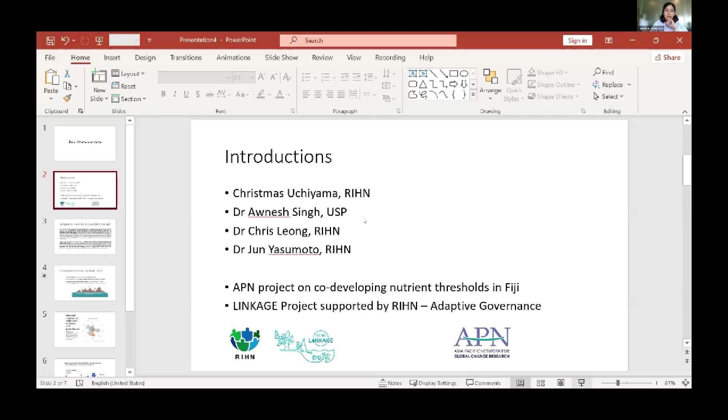So yeah, my name is Christmas Uchiyama, and this is our 9th day in Fiji. We just came from Ra province, and we've worked with the communities, collected some data, and had a nice engagement with the community there. I just want to give a brief introduction on this project, and we're really happy that COG is co-hosting this modeling training.

So for some introductions, again, my name is Christmas Uchiyama, and I'll be co-moderating with Nicholas Metherall. We also have here Dr. Awnesh Singh, Dr. Chris Leong, and Dr. Jun Yasumoto. I will try to make the training as manageable as possible.

It's a little bit tricky to facilitate on-site and hybrid training, both on-site and with online participants, but we're really happy to see many people interested in this topic. Just a little bit of background, and I know my colleagues here will introduce more, but this is titled Co-Developing Nutrient Thresholds in Submarine Groundwater Discharge.

This project is funded by APN. The main purpose is we would like to build the capacity of our local communities, as well as our early career researchers and people from the government.

However, in this particular workshop, the main aim is to introduce the concept of submarine groundwater discharge - that's the technical term we are looking for here - and how this relates with land-based activities, local culture, and practices in coastal communities here in Fiji. This is aligned with APN, the Asia Pacific Network for Global Change Research, which we are collaborating with the Research Institute for Humanity and Nature.

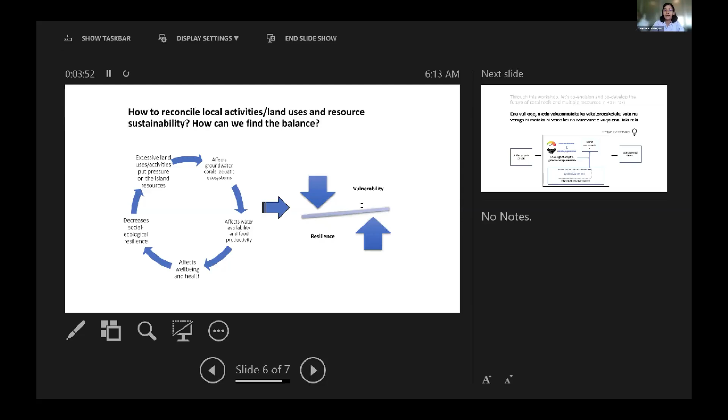So this is one of the aims of the workshop - to promote the importance of understanding this connection between the nutrients and the submarine groundwater discharge, as well as reconciling with local activities and local people, helping them find the balance between sustainability and agricultural development.

So this is part of a whole project, and this particular modeling training is for those who are interested in MODFLOW and in the way we could present data and customize models depending on an island setting. I hope our participants online here would have a lot of questions and would enjoy this training session.

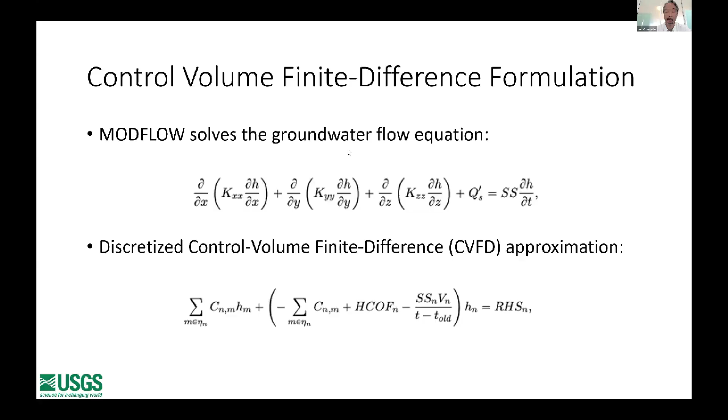MODFLOW has traditionally used a 7-point structured equation for groundwater flow. We now use an unstructured form of the finite difference equation in MODFLOW, as it offers more flexibility for spatial discretization.

MODFLOW is modular. Each package handles specific processes like wells, rivers, drains, recharge, or evapotranspiration. We can turn the package on or off depending on what we need to simulate.

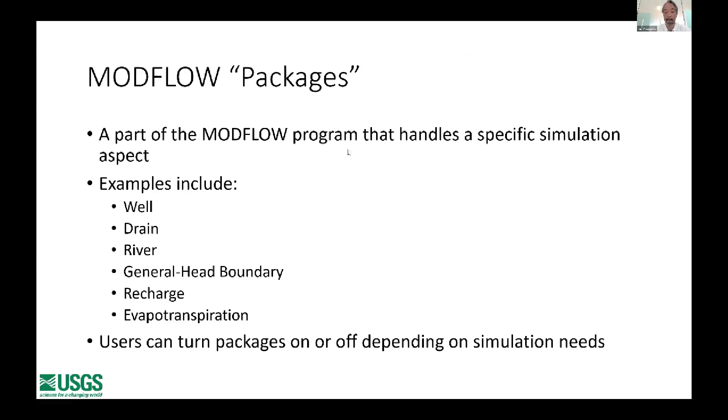The package concept in MODFLOW has been a nice way to compartmentalize the effect of boundary conditions or stress on the aquifer. Packages were designed to be independent and act solely as a stress on the aquifer.

Over time, packages became much more complex, oftentimes representing thorough hydrologic processes such as stream flow. Furthermore, it became necessary for packages to communicate with other packages, requiring new wiring that was never part of the original MODFLOW structure.

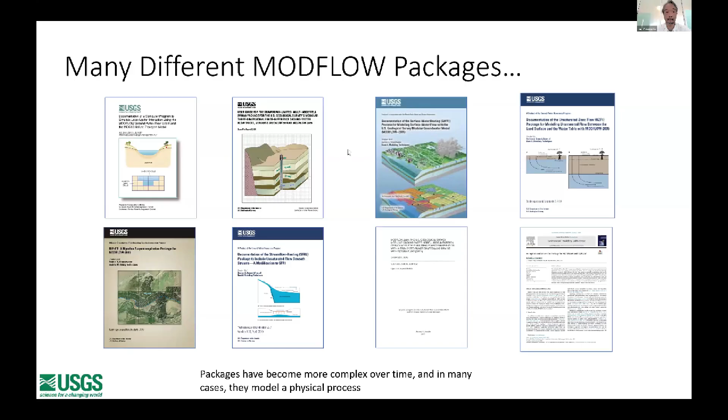MODFLOW was first developed nearly 40 years ago. It's called a community model because it's modular, teachable, and widely shared. Stable funding has helped MODFLOW remain reliable and accessible.

Since 1984, MODFLOW has had several versions. Today, MODFLOW 6 is the core version, but there are also many variants, such as SEAWAT for solute and heat transport, or CFP for karst and conduit flow.

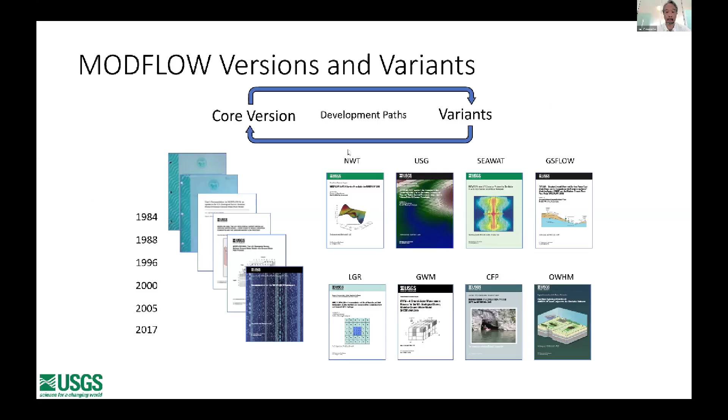MODFLOW can be applied at many scales, from local site to regional, national, and even global studies. For our workshop, we will focus on island and coastal aquifer applications. I'd like to show some examples.

This example shows an island situation. MODFLOW allows us to examine how freshwater lenses form and respond to pumping, recharge, and sea level rise.

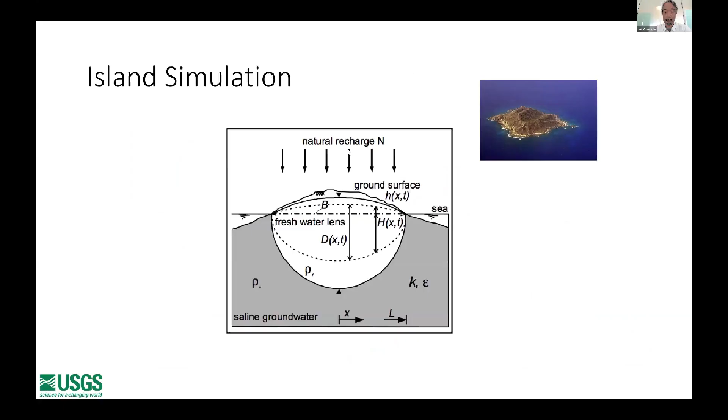A spin-up simulation helps the model reach an equilibrium condition before applying scenarios. This is useful when we want to study long-term change in groundwater.

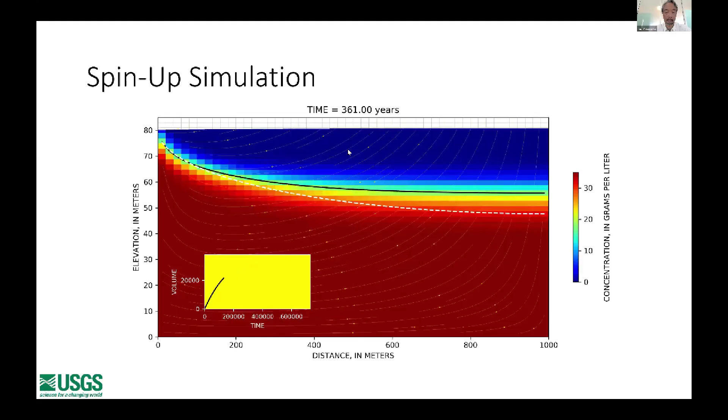Here is a scenario of sea level rise, 1 meter in 100 years. MODFLOW allows us to impose changing boundary conditions to study future impact, as you can see in these movies.

Coastal aquifer models help us understand the balance between freshwater inflow and seawater boundaries. These simulations are critical for small islands like Fiji. To simulate sea level rise, we adjust recharge and boundary conditions in MODFLOW.

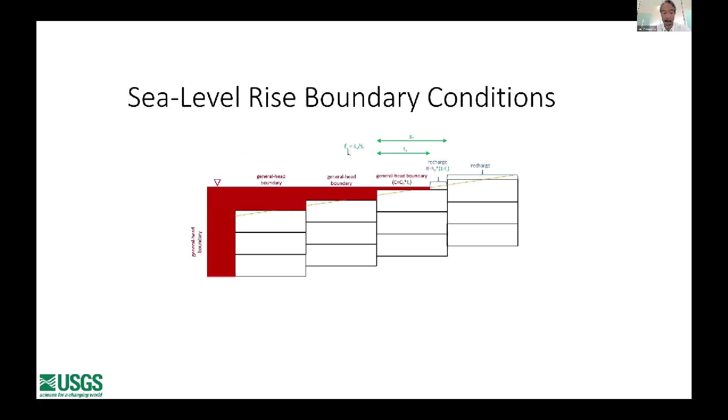For example, recharge can decrease with higher sea level, and the general head boundary can shift accordingly, like this. So by applying these boundary conditions, we can run long-term simulations and visualize the effect of rising sea level on island aquifers.

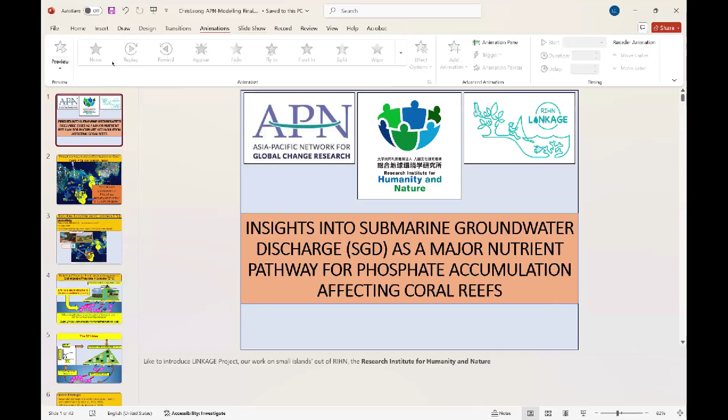Thank you. Bruce, just while you're sharing your screen, I had a question. Professor Yasumoto, you listed that there are different extensions and different modules for surface water, for example, to connect to MODFLOW 6. And you listed HEC-RAS as the model, but can you also use SWAT?

Let's dive into our modeling exercises. As I said before, we split the modeling because there are two approaches to MODFLOW 6. So just a very short recap on what Professor Yasumoto said: MODFLOW 6 is the combination of all different types of variants. Before, it was MODFLOW 2005.

You had to separate different files, which means that you had to create outputs of one variant to input into the next variant. That was kind of difficult, especially when there were compatibility issues. So now MODFLOW 6 has been developed. Everything is under one roof now, which makes it a little bit easier.

With my approach, I use the code. So I hope that you are able to write Python. MODFLOW 6 is compatible with Python. If you don't write code, it's not a problem because you can also use the GUI. The only difference with the GUI is that it's not reproducible. You cannot apply it somewhere else.

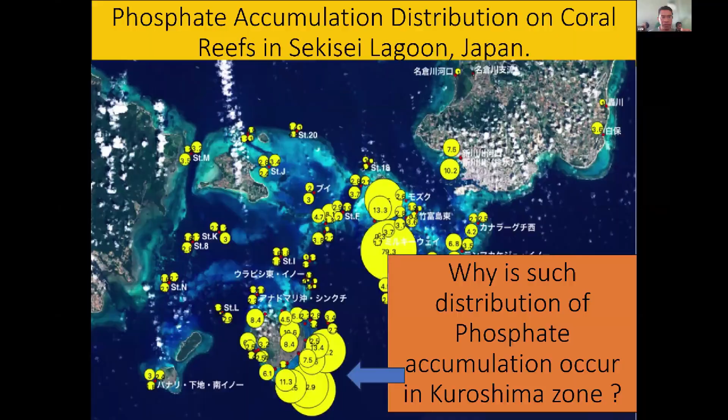All these yellow points show different areas where we dive in to collect coral samples. So we are hydrologists, why are we collecting coral samples? I'll explain this in the next few slides. Our study area is Kuroshima Island, in the southern parts of the Sekisei Lagoon. We also work in Indonesia and now in Rakiraki.

Kuroshima Island has a population of about 200 people. They have more cows than people, about 3,000 plus cows. The reason is that Japan has the most expensive beef in the world, Wagyu. So they breed these cows down there. These are the most expensive cows.

Their groundwater system is contaminated, so since the 1970s they have drawn water resources from Iriomote Island, the one close to it. Here we want to understand the terrestrial phosphorus mixing with the exchangeable phosphate in seawater.

So the idea here is we noticed around Kuroshima, when we were looking at their coral reefs, it was dying out. And so we collected all the samples and we're trying to figure out, okay, how can we think about reducing the amount of excess nutrients into the ocean. Yeah, we need to figure that out. How can we decide that?

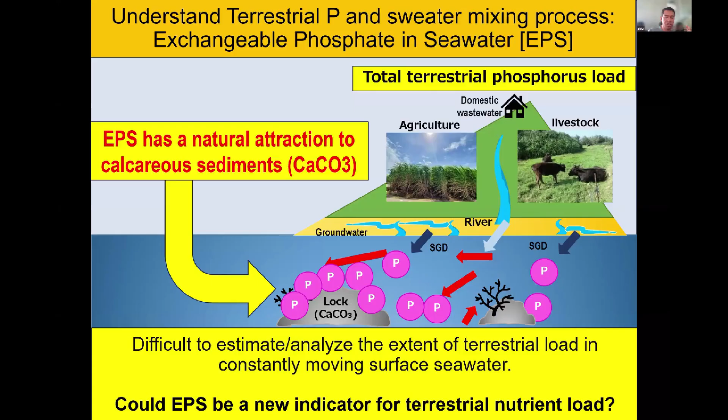And we use MODFLOW to estimate how we can at least give some agriculture or protection advice. So the idea is you load terrestrial phosphorus on the land, and then it seeps into the converted exchangeable phosphate in the seawater. And we have found now the threshold. Let's say the threshold is about 0.5 micromolar.

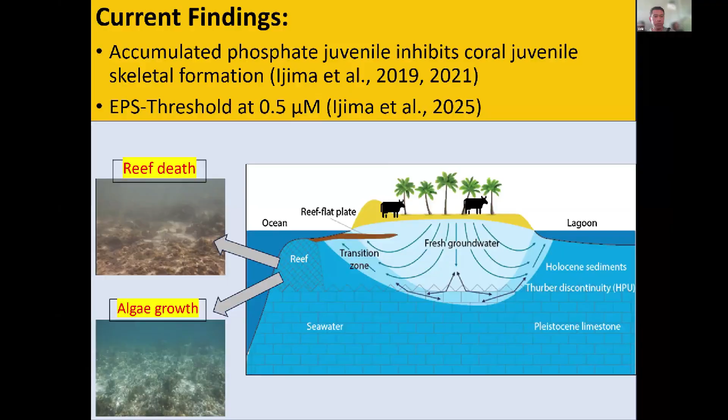Then we could use this as an indicator for terrestrial load to help our agriculture and fisheries connect. This could be one way we could connect interdisciplinary ministries or transdisciplinary objectives. So our work is to model the groundwater flow towards the ocean.

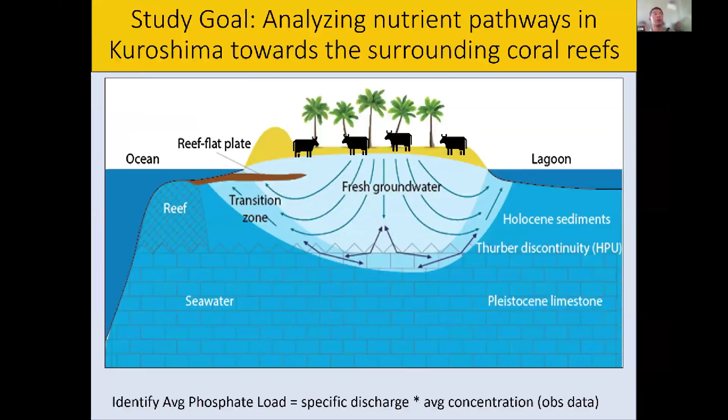So the next part is pre-processing. This is important. I think it'll be good if you have knowledge in georeferencing, ArcGIS and QGIS. It's a good tool to have in your arsenal. You can probably do this in MODFLOW, but I think it would be better if you prepared it in QGIS or ArcGIS. It's a little bit more simple. So the idea is here you can create your own grids. And there's resources on YouTube that you can look at and follow along.

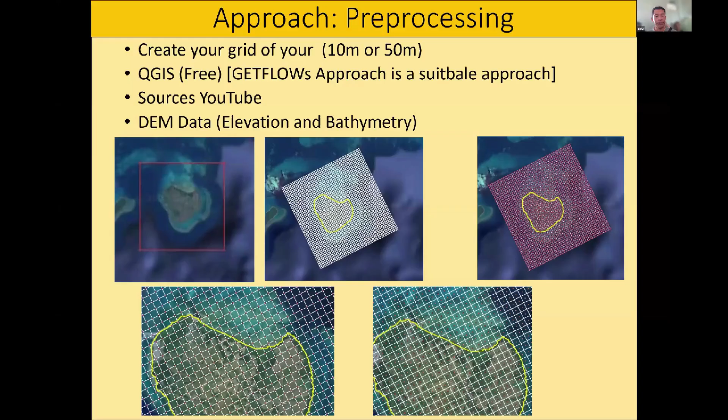So here is one area that we noticed people tend to forget, and I also happened to come across this myself. I forget to resample. So here we are trying to fit the grid perfectly. If you look on the edge, there's some spaces missing, and these create problems because MODFLOW is very sensitive to your grid setup.

These are setting up the dimensions. So this is also developed from MODFLOW. This is just setting the bathymetry and the elevations.

So depending on how you want to do your model setup, our team is trying to develop a systematic way for Pacific Island countries where they input different parameters and try to find out the accuracy, because Pacific Islanders hardly have data. So we're trying to put in all different parameters where we can see, like, oh, you only need these 2 or these 3 to get at least good results. We don't need the whole set.

And one thing you can do in modeling with MODFLOW 6 is you discretize the layers. So you can have just a single layer setup, but here you can discretize it to have a better flow throughout the cells. It depends on your geological information. You can make an assumption.

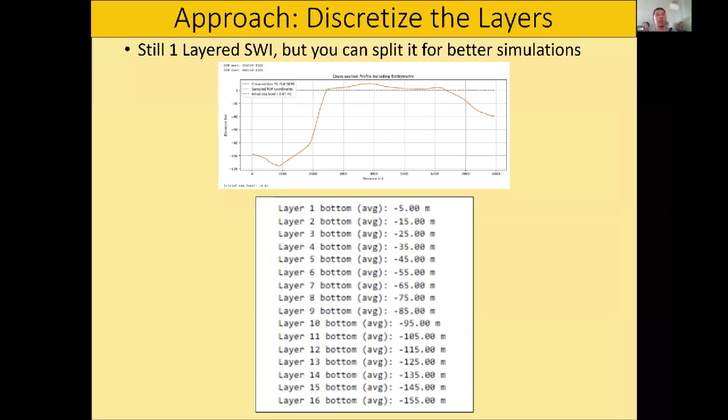Next, what we need to do is set up the initial conditions. So we need to find equilibrium before we actually run the model, because as you start off the model, it's trying to fix itself. If you look at the graph, there's a steep drop and then it starts to stabilize. So depending on your setup, you can run it until stabilized, but you only want to take the end part. The data from the end of your simulations is the beginning of your real model setup.

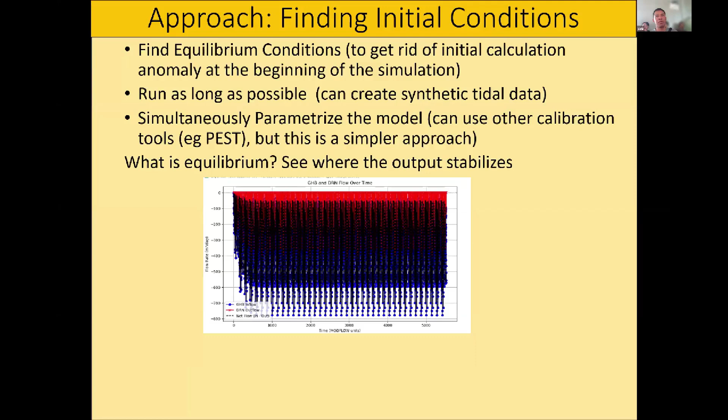So now we're setting up our initial conditions, and we want to set up parameters. Common parameters are the hydraulic conductivity, the specific yield, storage and recharge. Depending on your area, you could set up a range. So here what we did is we set up a range, and we just loop through it for every combination. So it may take some time, depending on your computer setup. Mine takes about 7 hours to run through all these combinations. We are trying to find the best parameter combinations to use as our initial conditions.

And the MODFLOW 6 packages are there: the TDIS, the iterative model solver, discretization, initial condition setup, saltwater intrusion, storage, recharge, general head boundaries, drainage, and the output control. I think Fatima will explain this in detail in her slides.

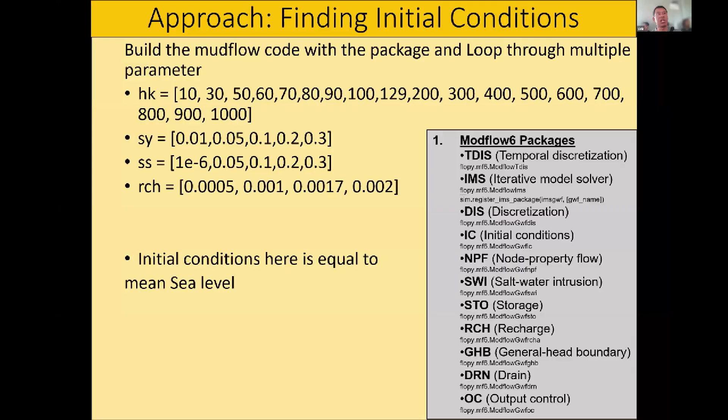When we rerun it, then we can start playing around. Now that we have stabilized the model, we can set up our main parameters. So here, if you look now, HK is 129, but you said, hey, HK was 400 before. That is the calibration; now we are actually using the values. How did I get this HK of 129? This can be from some mathematical equations.

You can use tides to calculate the hydraulic conductivity, because from the ocean, when it's high tide, it pushes the freshwater inland. So in the wells, if you remember, I had 2 points where our wells were. We can monitor the hydraulic head in the well going up and down. So we know the change in tide pushing those elevations in the well, and we can tell how much the hydraulic conductivity is.

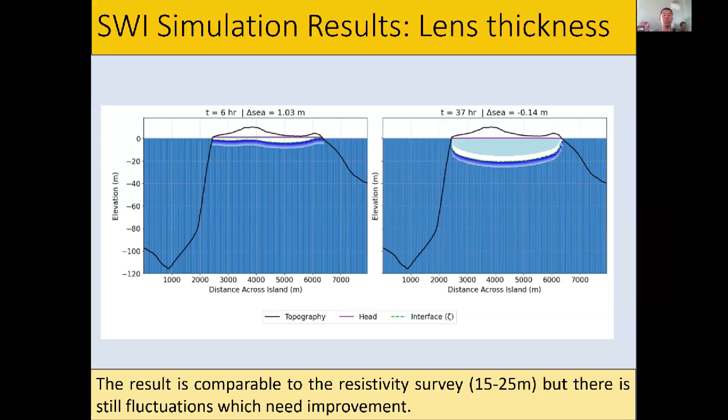So usually in real situations, when we go to the beach, we see the water coming out of the sand. So we only think that it's there, but it's actually further out into the reefs. So that's why we think submarine groundwater discharge is very destructive to coral reefs, because it actually just gets discharged straight out onto the reef.

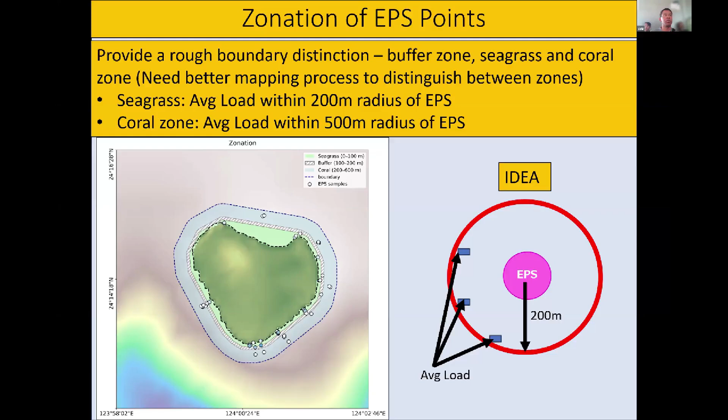Something like this. So we can actually point to where the terrestrial threshold is. This is incomplete, I'm still working on it at the moment, but this is an idea of what we have. So if we go back here, we can get the EPS and the average load, and you can plot it like that, and we can find something for our water resources management, like a preliminary assessment.

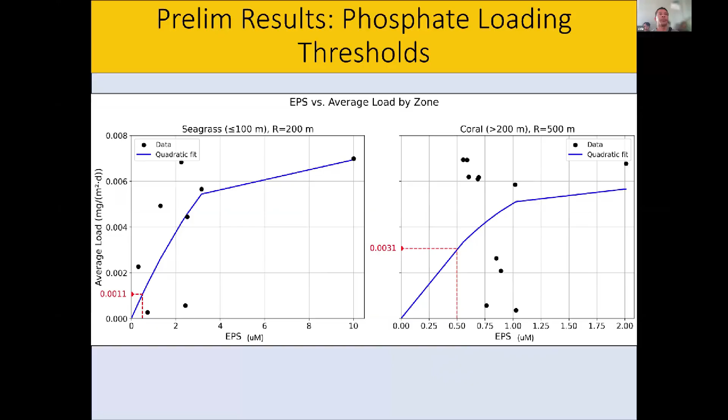So just the key preliminary takeaways. We know that phosphorus and submarine groundwater discharge are quite impacting the coastal areas. There's a little bit more that we are working on. We are the phosphorus team; our nitrogen team is also working to confirm that. And this is a first order approach. So Pacific Islanders, when doing our modeling, please make it as simple as possible. Do not try to increase the complexity of something that is already complex.

And it's important for our water resources management and coastal protection. And there are other things that you could do, but this is only one thing. So depending on your ministries, you would probably want to have water resources management for groundwater extraction and stuff like that. And I think that's my end.

And I hope to meet you next year, maybe during the next presentation, where I will lay out the code and we can work together. So please don't be alarmed. Just type there whether you know coding, and we can look at it. And I think artificial intelligence has really come in handy, especially for us Pacific Islanders. So we will use AI to help everyone understand easily. So if you don't know any coding when we meet next time, it's not a problem, because we will try to integrate AI into it.

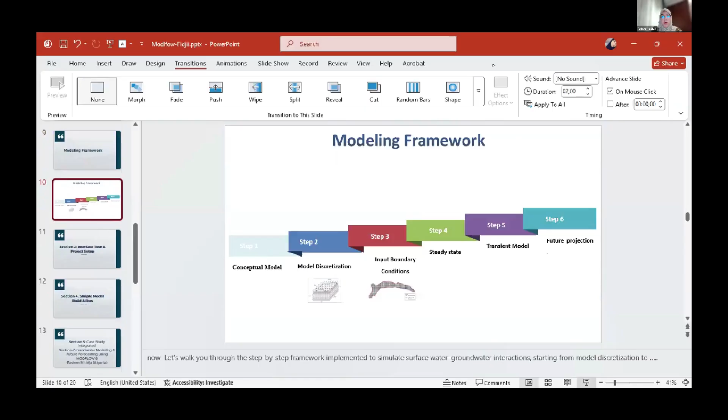And before going through the example, I just want to go through some basic information about the modeling framework. As presented before by my colleague in the workshop about MODFLOW and the equation used by the software, I will go directly to the modeling framework without repeating the other notions. So when we talk about the modeling framework, or which steps we go through when we model the groundwater for a quality or quantity study, we first should pass by the conceptual model. What do we mean by conceptual model? It's like building our data, filtering it, analyzing it, and setting which data we will insert in our model. We can set, for example, the number of layers, the thickness of the layers, the hydraulic conductivity, how many wells we'll have in our model, which packages we'll have.

For example, if we have any river that passes by our study area, what is the precipitation or the recharge? Do we have natural recharge? What's the rate for this recharge? Do we have any artificial recharge? Also, what's the rate? We need the wells for sure. The pumping or extraction from our groundwater is very important, so we need the rate. We can have some other packages based on our system or our groundwater and how complex it is. So this is the first step, which is the conceptual model.

The second step is using the grids, and choosing the grids is generally based on how much data we have and our area. Generally we follow the idea of having at least one well or measurement point in every grid. This is the minimum, okay? The third step is inputting boundary conditions. We can set as boundary conditions, for example, the sea, or inflow from adjacent groundwater, and so on. This is just briefly the steps, then we'll go one by one in our example. The fourth step is starting with the steady state.

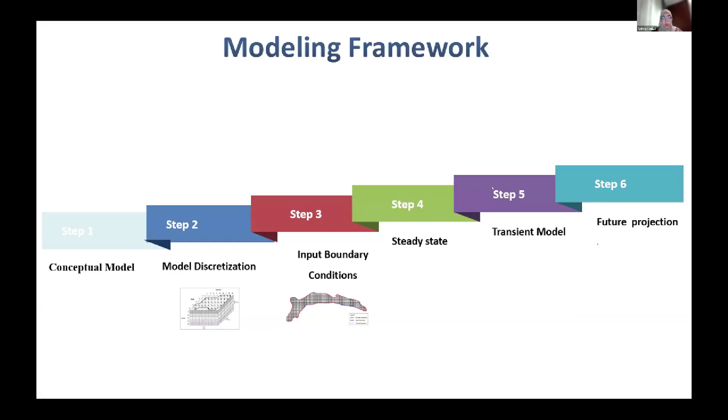And then we can also use MODFLOW 6 for future projections. For example, we can insert the recharge based on any models for climate change like CMIP 6 or CMIP 5. This is for the framework and the steps we will pass through when modeling our groundwater.

Now we'll go just for a quick interface tour. You have the tour image in the handout that was sent to you before the workshop, but I will go through it again. Let me just share my screen again. Give me a few seconds, please.

So this is the interface, what we call ModelMuse. Here we can say a model is opened. So we can pass by the main menu here. In file, we can import many kinds of files.

I want to mention again, as Dr. Chris mentioned before, it's very good to prepare your data as GIS files, shapefiles, so it's better to use the interface and not the coding. For example, here the study area, I prepared it already on GIS, QGIS or ArcGIS, then I import it here as a shapefile, which is a facility in modeling using MODFLOW and this interface.

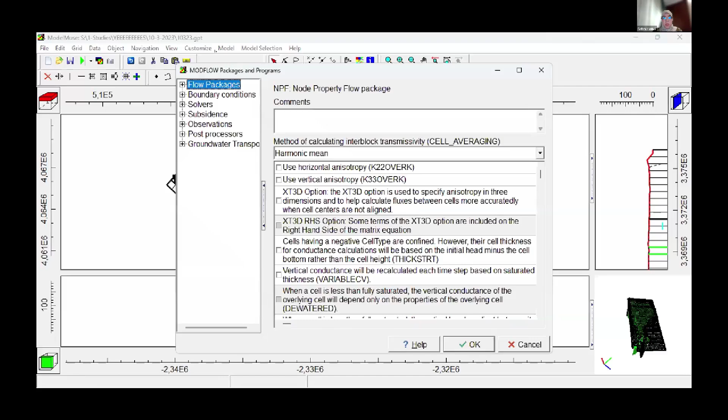Okay, so here we can see all the packages. We'll go back and press on Model and MODFLOW packages and programs, and we can find all the packages that are possible for using.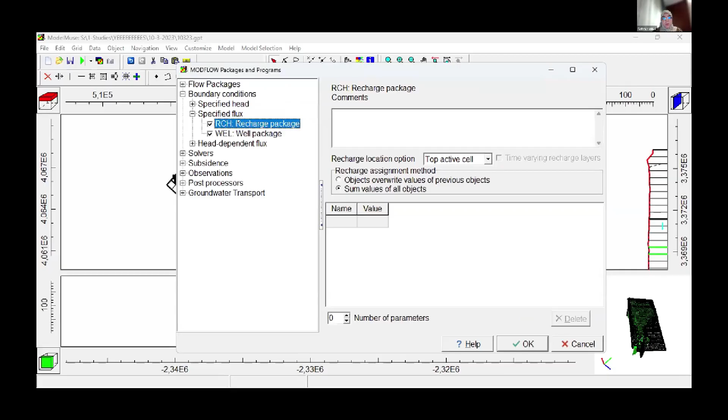And we have here the constant head. Generally, we use it when we have limits with the sea. We have the recharge, so we can set the recharge, for example, from precipitation.

We have wells, and we have some others here, like when we have a lake, or when we want to study the saturated and unsaturated zone, or go through multi-aquifers. MODFLOW 6 can model many aquifers at the same time.

We have evapotranspiration. Chris also passed through this, so I will go quickly, and during our practical example we'll come back to this again. For the solver, it will be the iterative model solution.

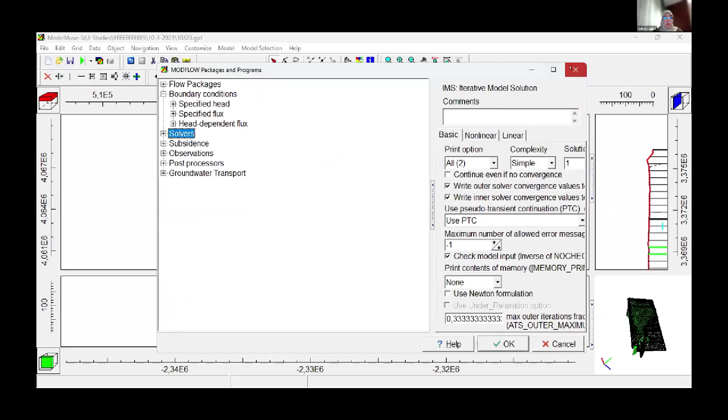This is for the packages, and then this is the layer groups. We set this generally in the beginning. We have the MODFLOW time.

Also, for example, this is only for the transient, so I set many periods. I have many periods, my unit was per seconds, so all the time is counted by seconds.

And then we have output, which is the most important in this part. And then here we select the model. With this interface, we can pass by using MODFLOW 6 or any other version of MODFLOW.

We have, for example, 2005 and others, even for quality, geochemical quality. And we have, for example, well footprint, when we want just to study the response or effect of a well or one pumping point in the area.

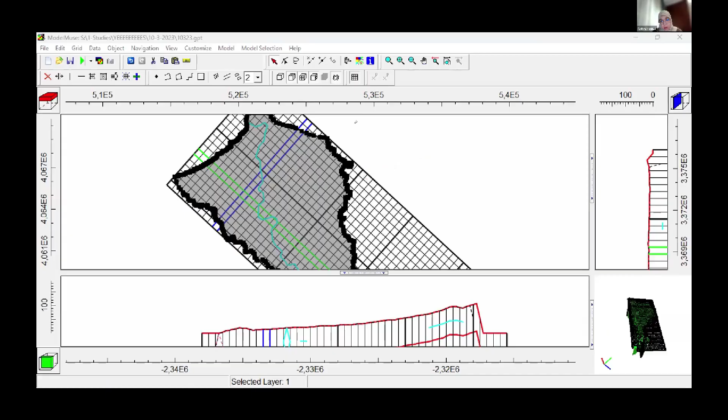So here we can use some, let's say, if I want to add any boundary condition, we can draw here, but I said that we rarely do this. This is also just for the grid.

Okay, this one is important. This is when we press to, let's say, run the model, this one. This is for running. And we have these two options also, or parameters or items, which are important.

So I can just hide or unhide, let's say, any drawing here or any package from here or any object. So for example, I go to MODFLOW features and I just hide the well. Okay, this is just more organized.

These are all the wells, for example, I have. I just can press and see all of them. So this is only for hiding and unhiding.

And now we can just go to the colorful one next to it to, let's say, see the results or any other parameters. For example, we can go to contours.

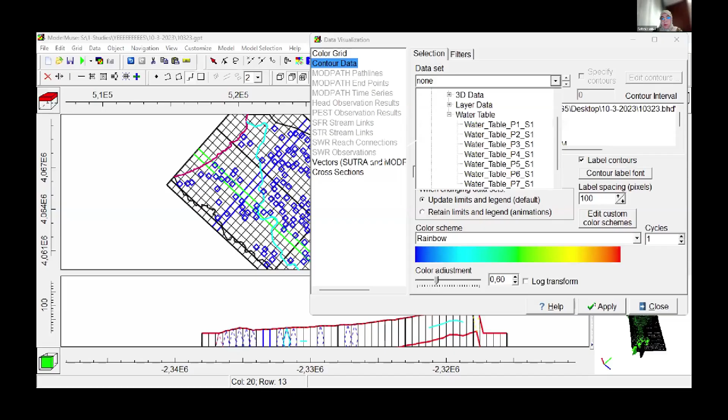And I go, for example, for water table for a period. And here I have, let me check and hide the wells. And here I have my results.

We can just show them as iso-piezo lines, or we can also have a colorful map. Sorry, so we just go to color grid and we press this. And it will be in this grid.

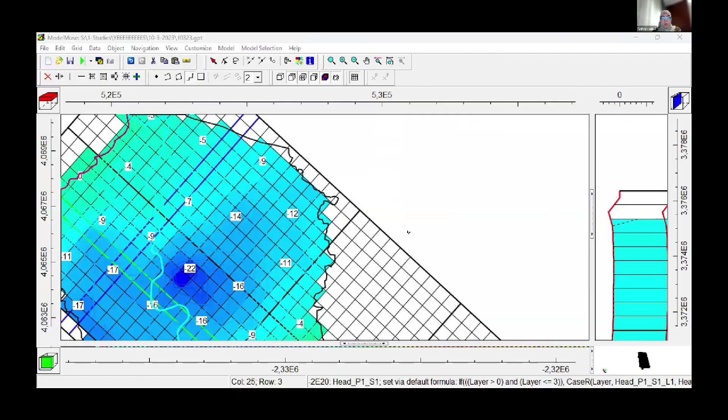So that's mainly all the necessary things here. We can go now to our model. So the model will be really basic, just to be more familiar with creating a model. Maybe in the next workshops, if we have the opportunity, we can go to more complex models.

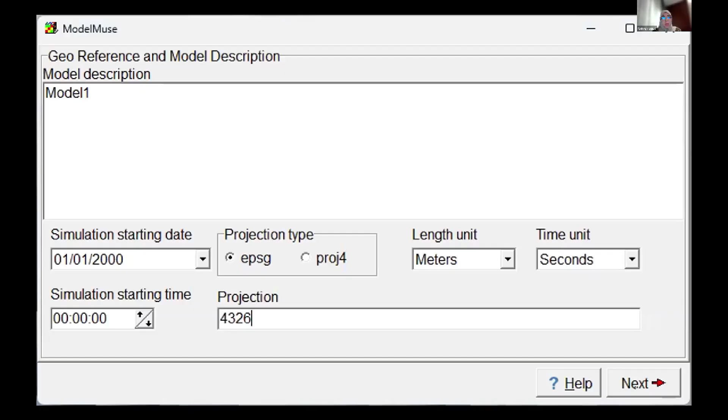Here we'll have the initial grid, with a number of layers, rows, and columns for our study area. Let's follow the same parameters mentioned in the handout, with a few small errors to correct. We'll go to 15 rows, 15 columns, and 3 layers. So I will set 15 and keep 3 layers. We can go for column width of 150 and 200.

This is when we set the model directly, but in case you import a shapefile, you will just open it and import the shape file. At the end, if we have enough time, I can show you briefly how we can do this.

For the elevation or thickness of the layers, we start from the model top. 20 meters below we have the upper aquifer, then at 30 meters we have the second layer, and at 45 we have the third one.

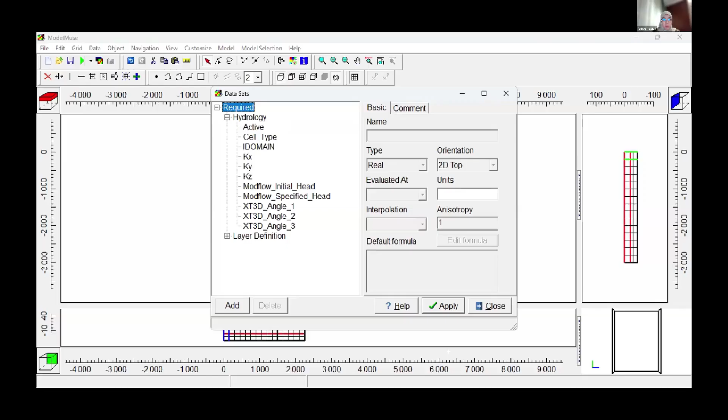Now we go to the aquifer type, whether it's confined, unconfined, or convertible in case there is a switch between confined and unconfined. So we go to dataset, edit dataset, and here we find the characteristics: hydraulic conductivity, initial head, cell type, and so on. Are you with me? Let's type 3 if we are at the layers parameters, please.

Okay. For anyone who is late, I will go again: mod data, edit dataset, and we go here. So I will continue, we go to cell type. Here you will find the default value, which is 0. We go to edit formula, and here we will use formula, kind of equations. We can go to case. Actually, you can do this manually for everyone and set if it's confined or unconfined, but let's do this using the logic equation function.

So we go to functions, we go to logic, and we press case. We will set that the first layer is unconfined, then the second and third are confined. For the layer that is unconfined, we press 1, just mentioning that the parameter is layer. Then we mention 1 for the first layer, 0 for the second layer, and 0 for the third. To confirm that the function is well written, you will have it shown on top; if there is any mistake, you won't have the formula on top. Okay, we can continue, we press OK and apply.

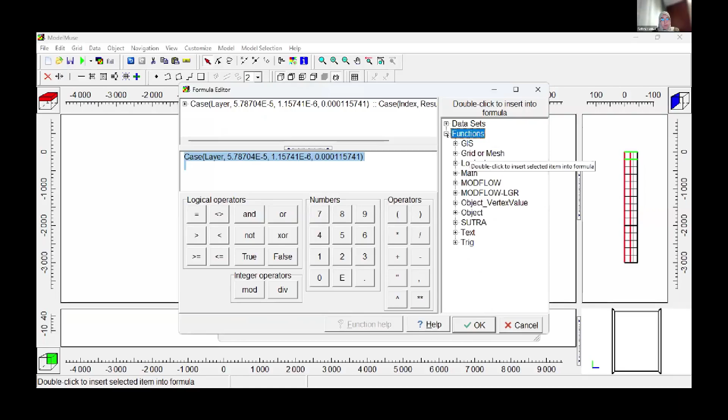I go to Functions and then to Logical. I press case and then I write layer because I'm setting this for layers. This is the first value for the first layer, the second value for the second one, and for the third one. I've already sent the values in the chat, and you can find them in the handout. Is it okay? Can you type 4 again if you input the hydraulic conductivity, please?

Yes, John. So I mentioned that KX is this value. I think not all participants here have the handout. So KX is this. Let me just write it in the discussion. And then KY equals KX divided by 5. And then we have KZ. This is the value.

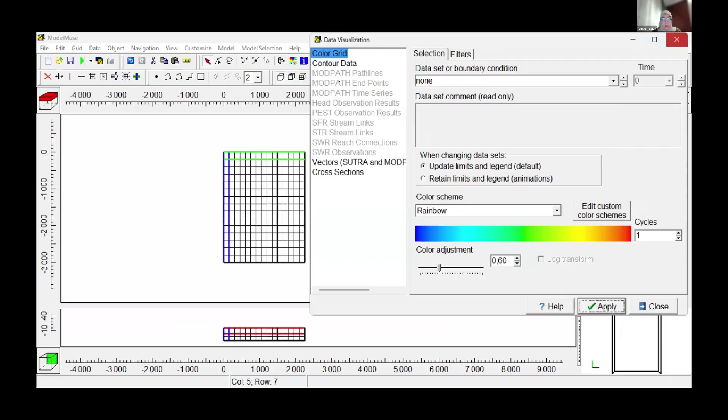But for example, for KY, we will have this color because we have only one. And we come back to none to have no colors. Yes, to the center, you can just go here and it will be in the center. You see this one?

I'm sorry if I'm pronouncing the names in the wrong way. John, you press here, so it will be in the center. Is it okay, John? Thank you. Okay, great. So if you have any kind of zoom or you can't see your area, just press here and everything will be in the center.

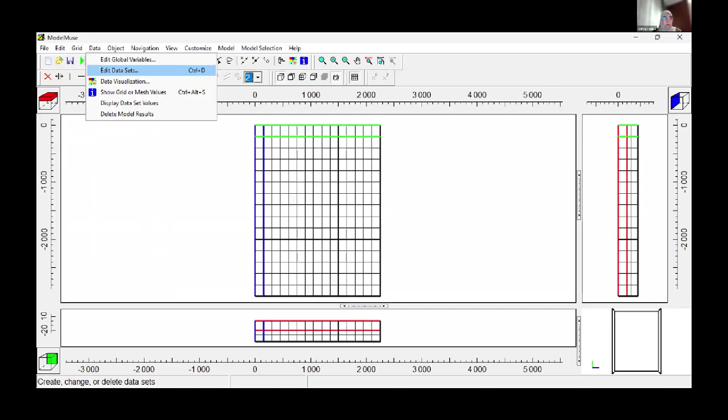We can continue now, just not to forget to set the initial head. I will come back to edit data set, and I will go to MODFLOW initial head. Its default value is model top. Let's go to model top -2, means under the model top by 2 meters. In the manual, it was mentioned +2, which is illogical. So just correct this, please.

So while modeling, we can imagine that this water bottle is groundwater. We need to mention what's the initial level. Then, for example, I will drink from it; this will be the extraction and so on. So the initial head is so important. For example, if we run our model on a period from, let's say, 20 to 25 for the steady state, the year 20 will be our initial head.

Now we'll go to defining our boundary conditions. We won't go through very complex boundary conditions. We'll go through constant head. Let's imagine that we have the sea as a boundary. We will set wells and we'll have a river, which are the basic packages that we can have. In this case, because it's a very basic example, we'll use the drawing tools, but usually we don't do this. Maybe next time we can do an example with shapefiles and a more complex example.

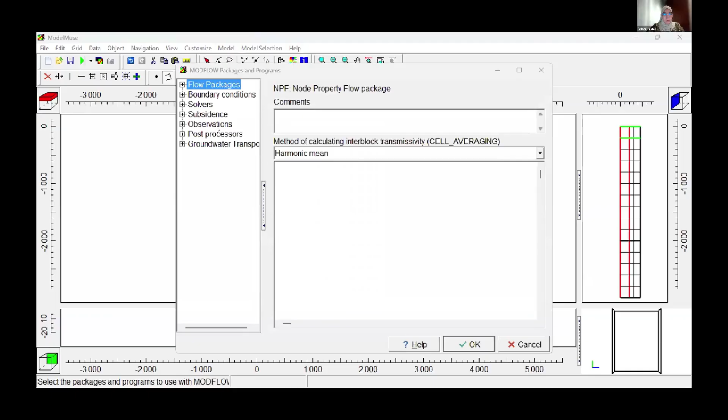That shows the packages. I will choose the 3 packages, CHD, River. Okay, so I will use this one for boundary conditions. We will check wells. And we can check river. In case we have a recharge, also we can import it as a shapefile. And we press OK. So when I do this, I activate these 3 packages. The others which are not checked are not activated.

I will just go back to do the same thing I did before. I draw the line and, as you can see here, because I checked the packages I will use, I will have them here. So I will name it CHD. We can give it a color if you want to change the color. For example, it's a line. Let's do it red.

We keep these boundaries from the model top until the upper aquifer, because the sea is along these layers. And then we go here and we need to check again that this item, or this line, or this shapefile in case it's a shapefile, is an input of CHD and not for the other packages. So we need to specify again, and I will press here.

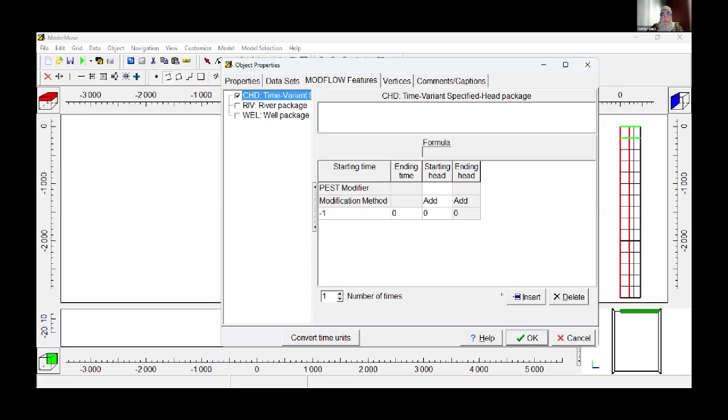When we went to the packages and programs, were we supposed to select something before we went into the next step for the head, the CHD? It was quite fast. Yes, of course, I can repeat. Thank you. So I said before inputting any packages, we have to select which one we use. So we go to Model, MODFLOW packages and programs, and then I will select which ones I will use.

And by the way, even if you select 3, and later you want to use another one, you can just check them again. For example, I have a lake, so I can just go again and check the lake too. So you can add a new package at any time. Is it okay for Nicola?

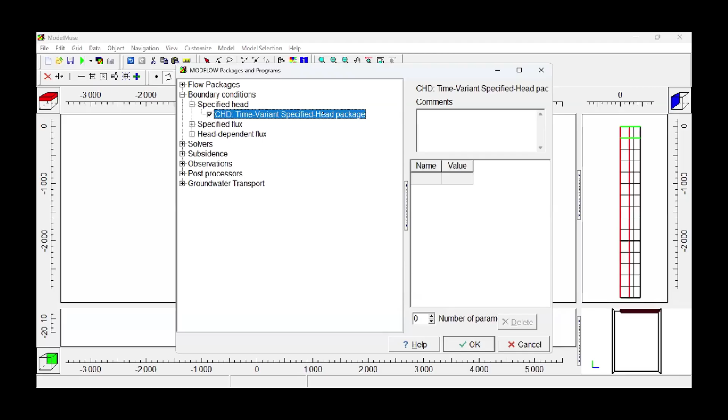That makes sense, but within the boundary conditions, were we supposed to tick the CHD time variant or not? Because once we've ticked it, are we supposed to input any parameters, or just say okay? When I first opened it, it was unticked, so I ticked it, but then I wasn't sure if I was supposed to use the multiplier or add parameters or anything like that. But it doesn't look like I need to.

So let me repeat slowly. At the beginning when I just drew the line but didn't check the packages, it doesn't work. It's like I didn't do anything because the packages were not checked before. The step is that you need to check the packages, then you put the body, let's say the shapefile or the line. So the first line that you draw doesn't mean anything for the model. Okay. Thank you.

She will continue and you'll have to put in the parameters later. So you set up your object properties, the different packages that you want, and then you introduce the values later. Okay, thank you. The value for CHD I mentioned is just 0. So she's setting a constant head boundary of 0, and the initial head is 0? No, the initial head was MODFLOW model top -2, and then the CHD was 0. Okay, thank you.

Okay, so this is for CHD. We can give it a value or we can go with 0. Then we go to the well. Usually we have many wells in the area, but in our case we'll just mention one. For example, we put one here. So which item or icon will I use? This one, the dot one. And I will put it here. You can put it in the same area or in any other area.

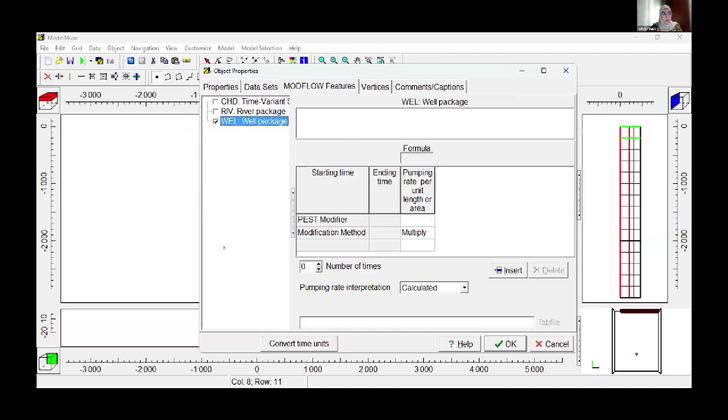In this case, let's take it like this, and I go to MODFLOW features always here, and I will check well, because this data input is for the well packages. I keep always the same period, the steady state period. And here the parameter I need is the pumping rate per unit length or area. So we need the pumping rate for all the wells we mentioned.

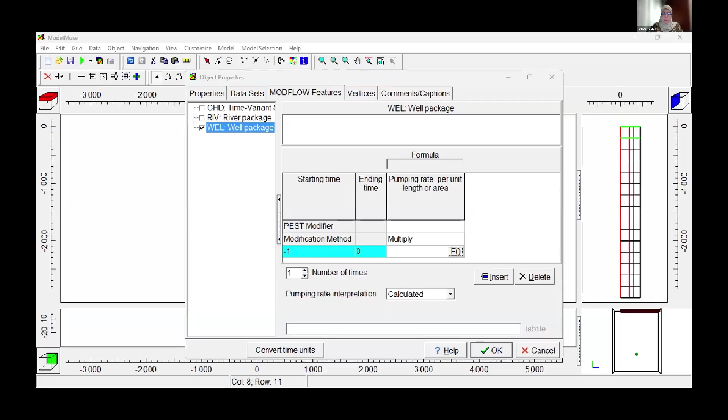In this case, as it's extraction and pumping, we'll put the minus before the value. Let's go to this value. I'm just copying the values here in case you don't have the manual. This is the value. Sometimes in some areas like the arid areas, they also go for artificial recharge.

So we can have some wells just for recharge. In this case, we can just put plus to mention that it's recharge. We can still use the well package, but with a plus to mention that it's recharge. And as it's not interpolated, it's the real value, I will just press here direct. If you are not sure about the value and it's interpolated, you can just go to calculated. And you press OK.

Okay. Please write 8 if we are in the same step. Thank you, Nicola. What about the others? If you need me to repeat, please mention it in the chat. For the teams that are working together, is everything going good? Do you need any help? Any question?

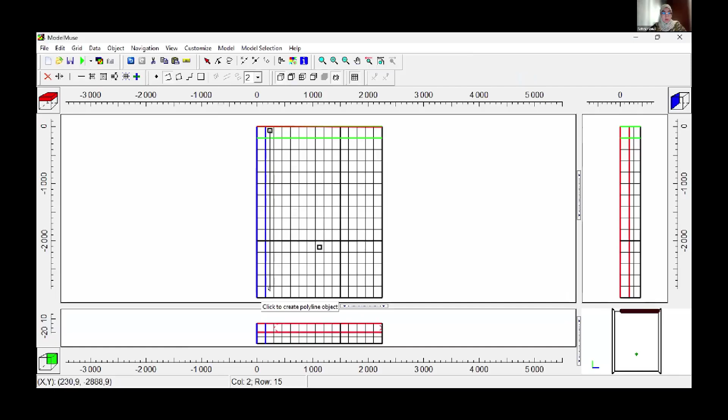And we can, for example, draw the river. Oops. Like this. Just use another tool. Let's use this one so we don't have any extra lines to the other side. Always when you draw something, or even when we import the shapefile, you will have this window automatically. We'll name this riv. It's the river package.

So please, let's do this again. You go draw a line using this tool. This one. We draw a line which is supposed to be the river. And we'll have this window. So this window is to set the parameters of the package. I will continue.

So for the river package, what do we need? Let's go first to check it. So I always go to MODFLOW features, and we check river package. Always the period is the same. What do we need now as input or as information for the river package? So we need the stage, we need the conductance and the river bottom.

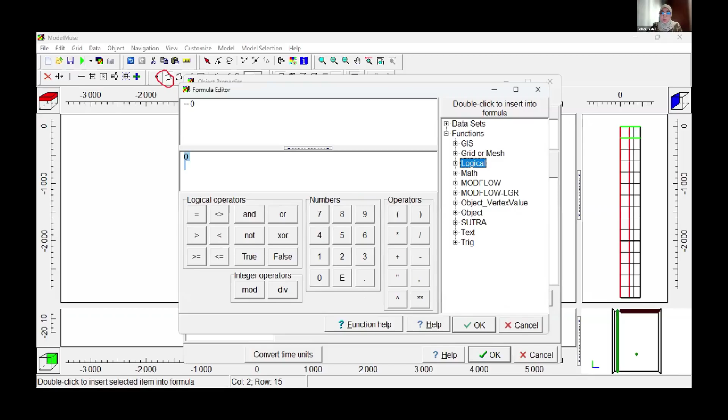I go here. We can generally use interpolate for the river stage. Specifically, it makes a difference in a transient model where we will generally have a longer period, and we have many changes in stress parameters.

So go to interpolate, sorry, it's math. Yes, we go. So I will repeat: functions always. I go to math and interpolate. In case you have the results from another model, or even from measurements at the site of the river, you can just mention them directly as values. For example, it's just model top -1, and then the river bottom is model top -5, and so on. In this case, okay?

So let's mention it by interpolation. The river stage, we say that it's a fraction. We press on F. We go to math, to interpolate. And we can go to model top -1 and model top -3. Sorry, this is the top, so let's do -2. And then for the other one, for the bottom, we might mention a lower level.

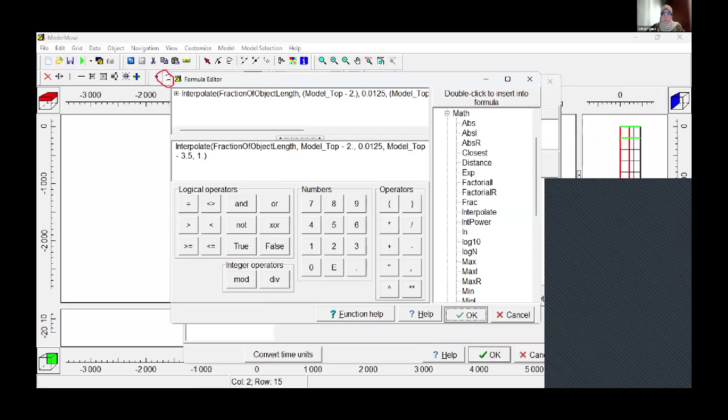And then we have the conductance value. Generally, it's calculated according to the type of the bed of your river, and the thickness. Let's take it 0050. You need to calculate this according to the geology of your river. For the conductance, all the values are mentioned in the manual. Just for the river stage and the bottom, we change a little bit.

Can we type 9? And if you want me to repeat, please type R. 9 if it's done, and R if you want me to repeat this step. Do we need to repeat? Are there any questions? Good, John. What about the others? I can repeat, guys. Yes, okay. So I will repeat this part. First of all, I go to this. Please try to follow me.

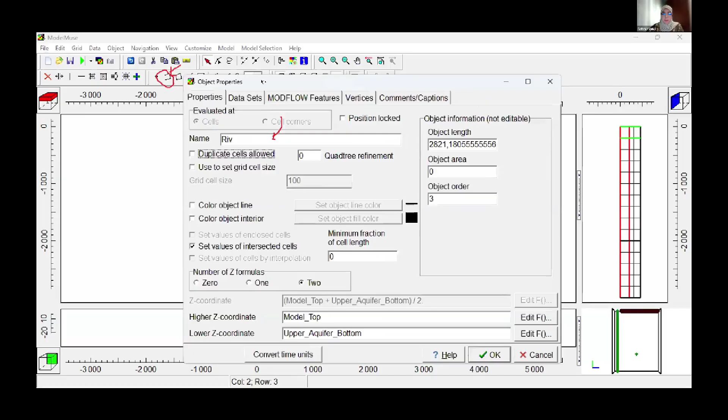So I go here. I will choose this tool and I will draw this line, which is considered as our river. Once I draw this, I will automatically get this window. You will have here objects, so you will name it river. We can keep this as it is, but as I said, in case you have a well used for pumping only between 2 layers, for example the first 2 layers, you have to change the bottom.

Then we go to the MODFLOW features, and besides the timing, we have 3 parameters for every river package: the river stage, the conductance, and the river bottom. I repeat, in case you have bathymetry data or data of your river stages and bottom, you can just insert them directly as values. In our case, we'll try to interpolate using the function.

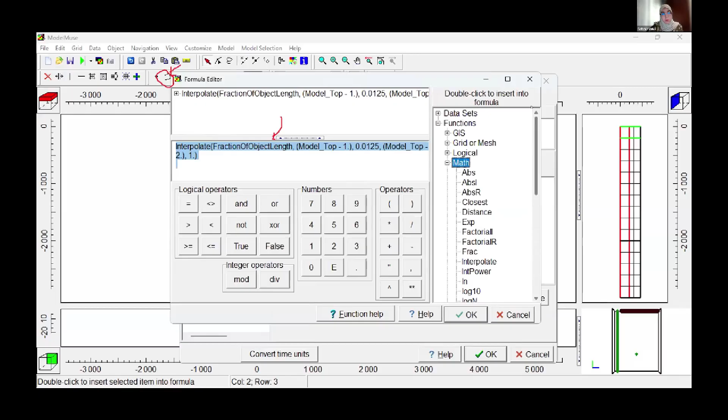So if this is empty or with 0 value, you just press on the F function, and we go not to dataset, we go to functions, to maths, and we press on interpolate. We will have the word interpolate. Then you can copy the interpolation of the river in the cells. The interpolation equation is already written in the chat. I will repeat it. River stage.

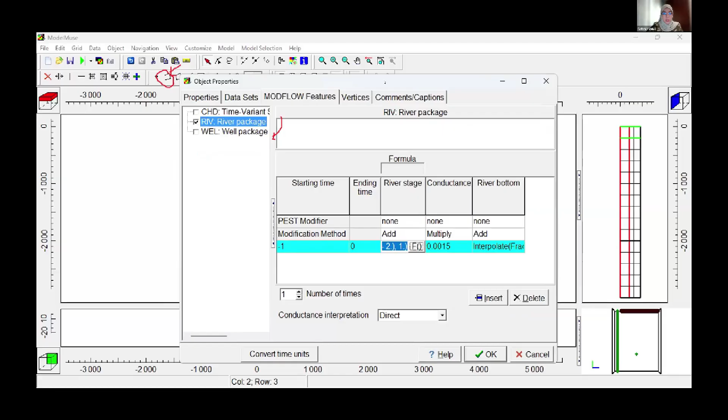It's in the chat. For the conductance, you will set this value 0.0015. And for the river bottom, it's the same thing. We'll use the same function, interpolate. You press it, and here is the function for the bottom. It's in the chat again.

Is it okay? I can repeat for the third time, just for these packages. Do we need to repeat? Yes. Christmas, what's the point that you're struggling with exactly, so I can go slowly. Sorry, we just finished that part, so we can move forward. Okay, great. What about the others?

Is it okay? Can we press 10? Others, I can go ahead? Everything good, all good here. Okay, so I will continue. In case there is any issue, stop me, please.

Okay, so we set the three packages. All the parameters are done. Now we can try to run our model. Just did this. So how to run the model?

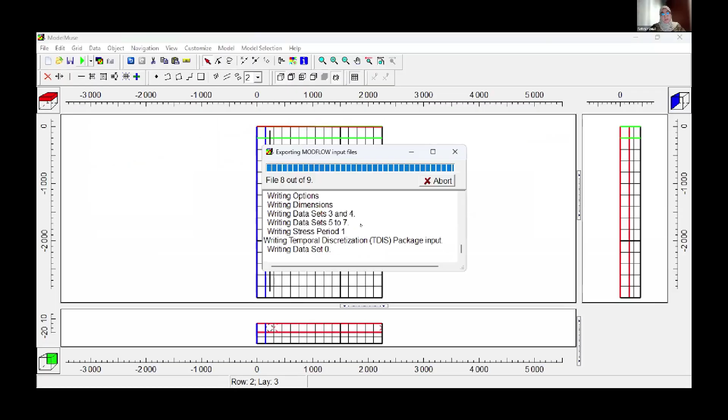I have a mistake here. It's okay, so the model is done, but I think this one is not working. Let me check this. What about you? Is it okay?

Oh, the pumping rate, how much was it? What about you? Let's press 10 if you have a smiley face and no error message. If you have an error message, let me know what it is.

Is it working for you? Okay. Is it okay? Let's press 10. You have to get the...

Fatima, excuse me, you have a question here? Yes? I can't hear you correctly, can you repeat please? Can you just go back to save the model? I can't hear correctly, sorry. Can you type, please? Can you come back to what? Can you go back to how to save your model?

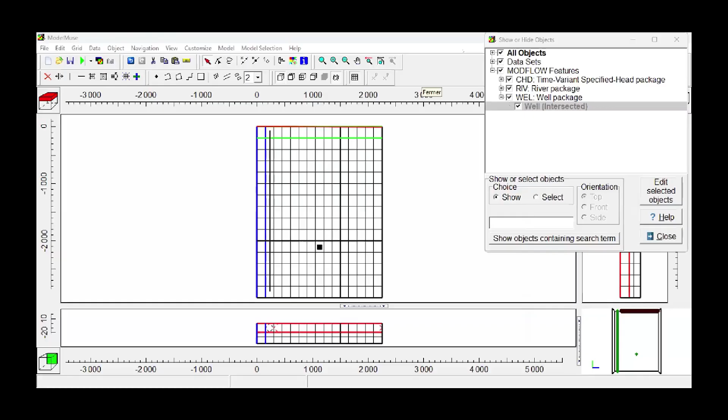Yeah, okay, I will check this. Yeah, I will pass through again. So you go to run. Okay, listen, you go to run. Once you press to run, automatically you will go to a window where to save. Okay, a message, yeah, and you just press yes.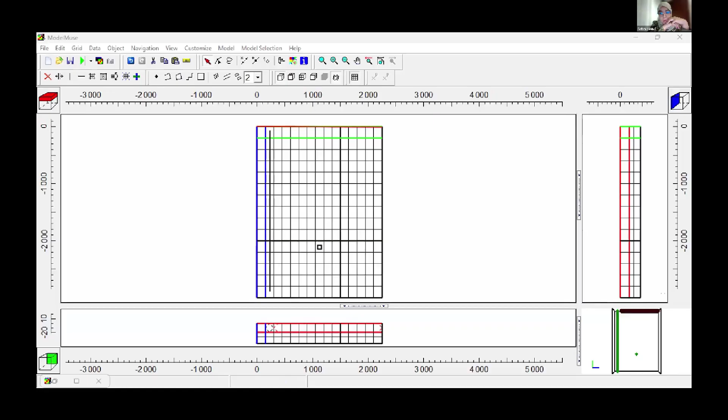For the others, do you have any? All good, great. What about the others? Let's press 10 if it's okay, and R if you want to repeat. So once we run the model, we'll get automatically the window to save it. Great, 10, good job. So once we have the results, we can get this.

It will be opened automatically, and down we have the volume budget, for example, we have the in, what's going into our model, and the out. And for the steady state, we'll get approximately zero because of the law of mass conservation.

Just in case you have many periods, the steady state and the transient, you will find many periods, so we'll just name here. You can check all the folder, okay? Now, once we get this, great, so you have all 10. Now we get our data, our results, our model was running well. We will import our data to see that.

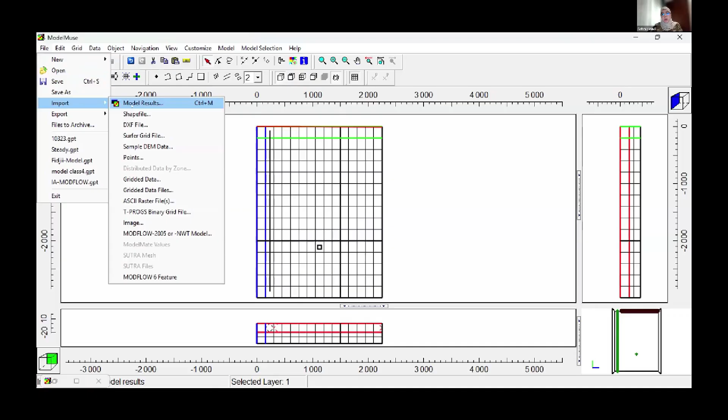So I will go here to File, Import, and I will import model results. I will repeat: File, Import, and model results. Now what we have in our model is only the input. We need to import the outputs or the results that we got from running the model. So I will press on results, and I will go to the extension BHD, and I will mention open. Sorry, I forgot to change the language. Just it's open.

And we open. Once we open, we click on open, we will get this window. This window is to mention which period I want to import its results. For us, we have only one period, but in case we have many, for example, a model of 10 years, and I want just to show the last 3 years, I will mention only this. I can't separately show the results, so this is checked because it's the only one we have.

We can get as results color grids or contour grids. Let's go for contour grids for the piezometric level or the head, or we can press neither. So I'll go to OK. And here I have the piezometric or the head lines.

Please just tell me, press 11 if you have the lines or the headlines, not necessarily as mine, because I'm not sure that you did all the lines like me. If you didn't, which is logic that we don't draw the lines in the same place exactly, so we won't have the same lines, really the same. So press 11 if you have imported the results correctly, and R if you want that I repeat.

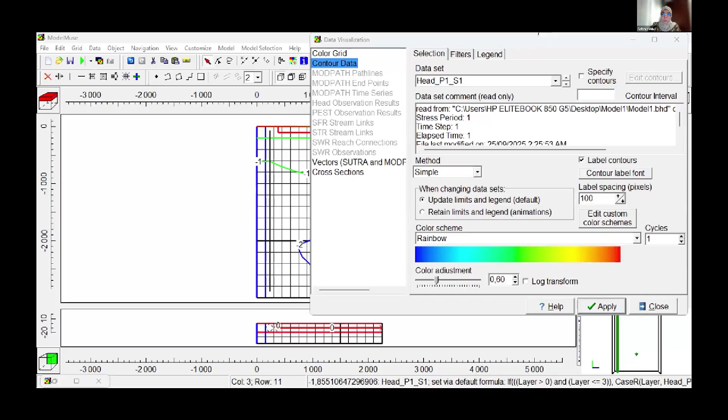Actually, the process is the same, but normally we use the shape files. We import them. I say again, go to File, Import, and there it is. The most important thing is to use the right projection for your shapefile when you create it on GIS software, and when you import them and when you create the model here. So you need to choose the right coordinate or right projection. In case you don't choose the right one, you won't see the inputs properly located.

We have only one 11. What about the others? Do you have any question? Any issue?

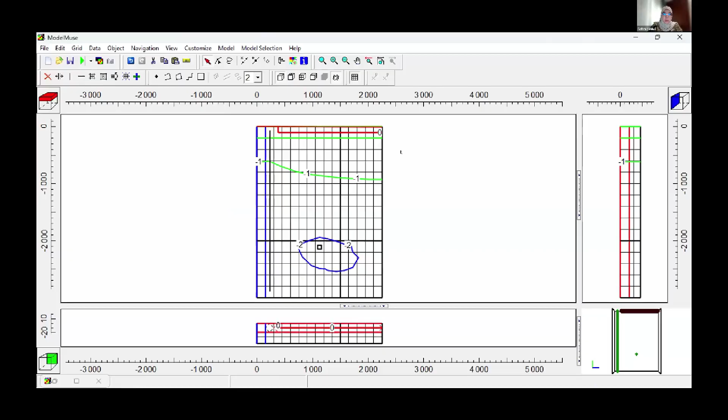Okay, so this is the simple model. Now we'll pass to showing you another more realistic model. So we can just pass through quickly, sorry. Give me just a few seconds to open it.

So I go to File, and you will find your history of models mentioned here. I will go to this one, for example. I press next. And it's opening.

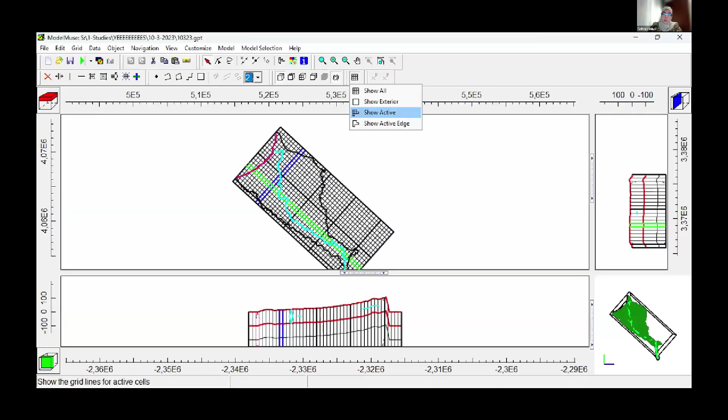So for example, this is a more realistic model for a case study in Algeria, in North Algeria. I will show you how we inserted the data really. So for the boundary conditions here, just for the area, I just created it in GIS and imported it as a shapefile.

I just go here, import shapefile, and import it. So I choose the right coordinate for Algeria, for North Algeria. For Fiji, we'll use for Fiji, and so on. Then even for the river, I imported, and for the boundary, constant boundary head, it was the same. All was shapefiles. I didn't draw anything on MODFLOW or on ModelMuse.

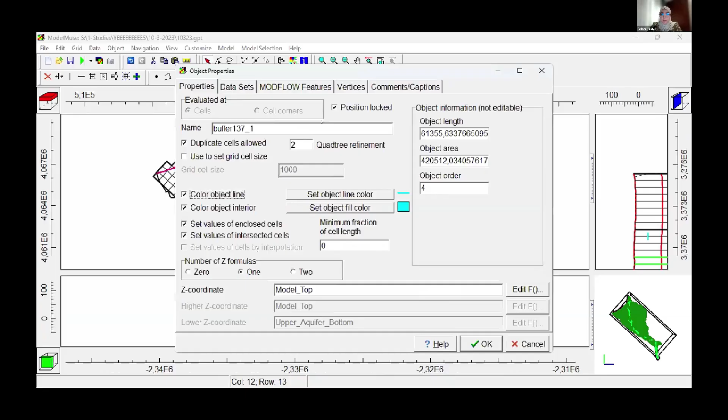And then we had the wells, also the wells. So remember, if I press here, it means I will show all what I have as objects here. So I will click on wells, and these are the wells I have.

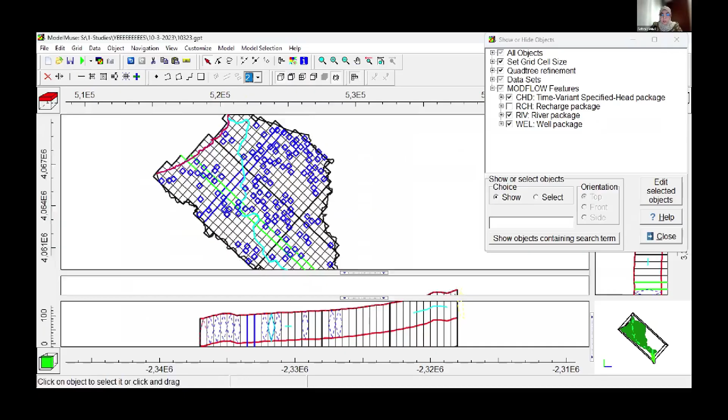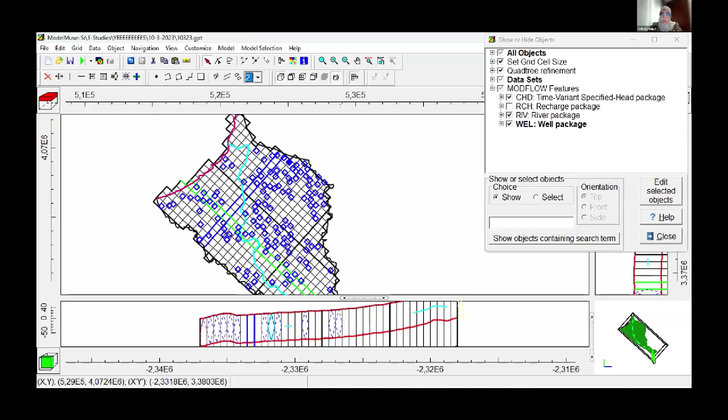So for every well, I have to input the pumping rate. Also, the wells are prepared from a GIS shapefile and imported here. So once you prepare all your data, using GIS is part of the conceptual model. We need to have a clear picture of our model, then prepare the data on GIS and import it. It's important to have some knowledge using GIS.

This is for wells. For example, if I press any well, we have a column called Q, which I imported from the shapefile, where the pumping rates are. So I didn't need to mention them manually because I have a lot—140 wells here.

In the same way, we have the recharge. We can take it for the whole area, or if you have zones with different recharge rates, we can also do this using GIS. For example, let me remove all this. We can separate it into areas, and every area has a different recharge rate.

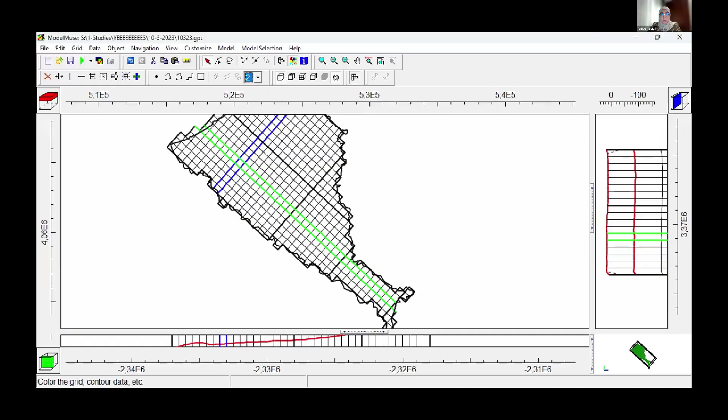This is my model. When I want to import my data, I think it's already here. I go to Contour, data sets, and optional—I have the results, water table, and many periods because this is for the transient part. I can set this one, mention a contour interval of 5, and get them like this.

In this study, we also go to future prediction. Mainly in our study area, the recharge comes from precipitation. So we get the projected precipitation from CMIP6, the climate model—we had 5, but the last one was 6. We get the precipitation, and in the area, the recharge from precipitation was estimated at 20%. So we take 20% from the projected precipitation and add it, running the prediction into the future. This is how we do it, and we can get many maps like this, comparing with our observed data.

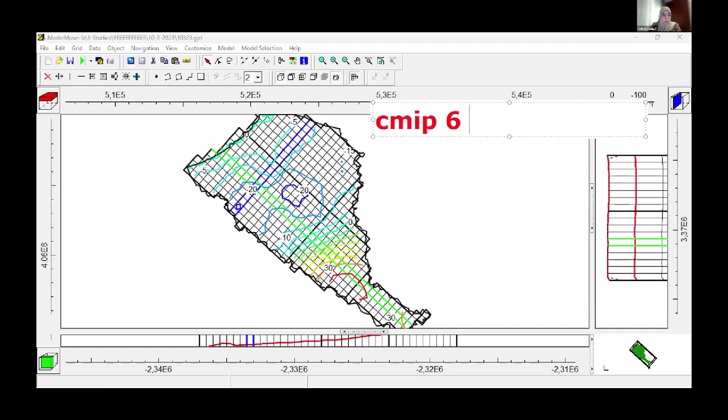This is for the steady state. Let me know if you have any issues with the modeling. If not, I've come to the end of my presentation. Do you need me to repeat anything before passing the mic to the host?

We are supposed to now take questions. I wonder about the online participants, whether there are some clarifications, comments, or questions related to applications. Shall we do it now, Nick? Can I pass this to you? Then I'll also collect. Sure, Malakai here, one of the participants on site, is just trying to write down his question. No worries, over to you, Nick.